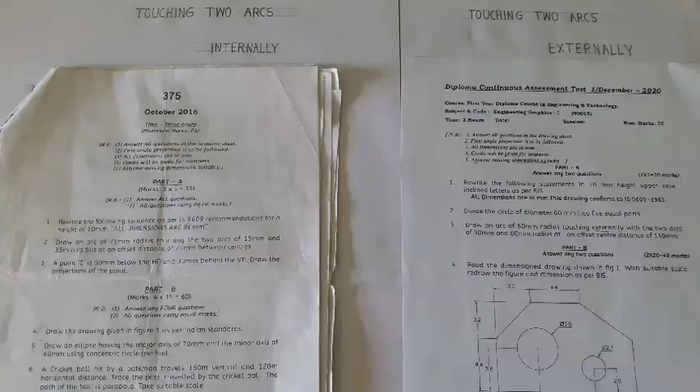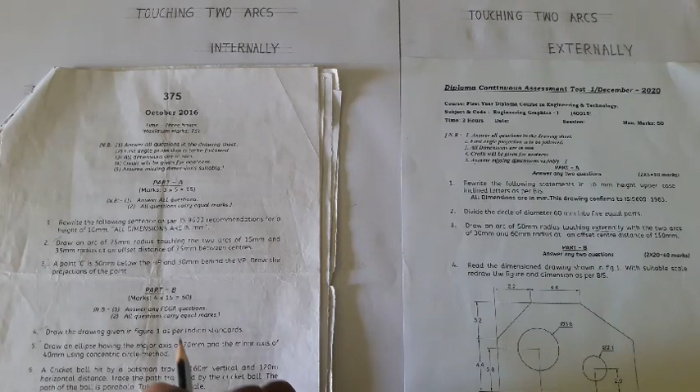Okay, how to read the questions? First of all, we read the touching two arcs internally question. We read: draw an arc of 75 mm radius, touching the two arcs of 15 mm and 35 mm.

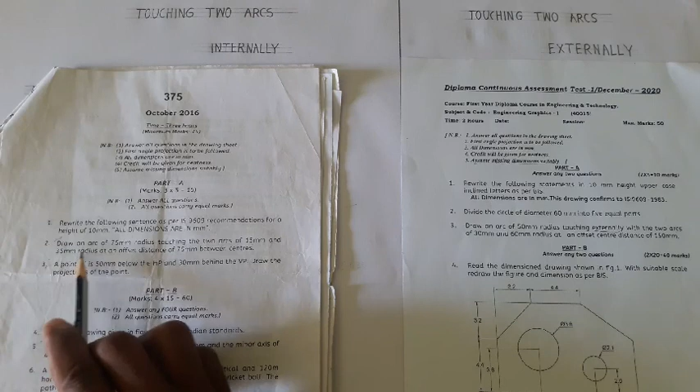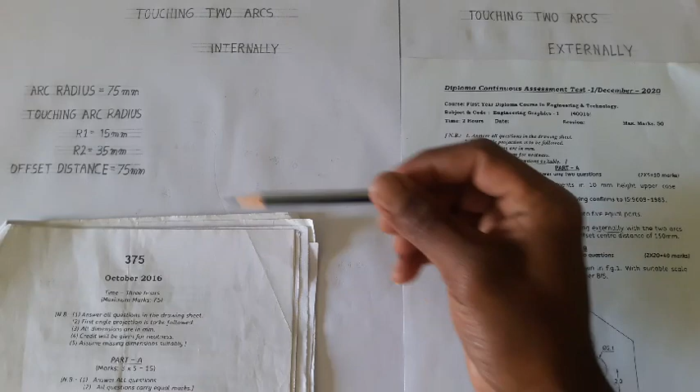Between the centers. Okay, this is the question for touching two arcs internally. We write the following data: arc radius 75 mm, touching arc radius 1 15 mm, radius 2 35 mm, and offset distance is 75 mm.

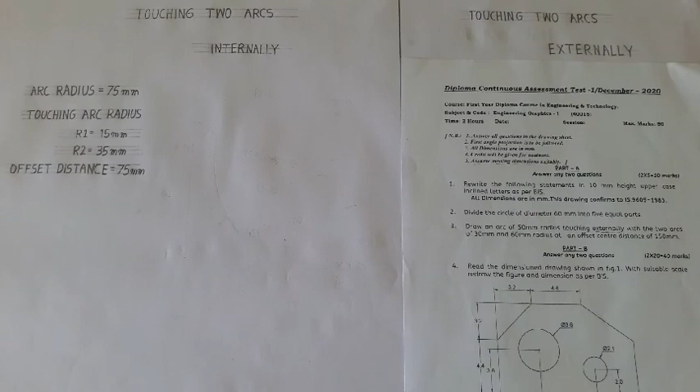Next we read the touching two arcs externally. This is the question for touching two arcs externally. Draw an arc of 50 mm radius touching externally with the two arcs of radius 1 30 mm, radius 2 60 mm, at an offset center distance of 150 mm.

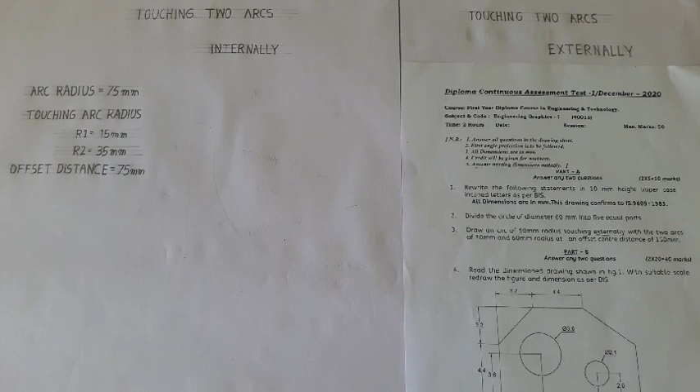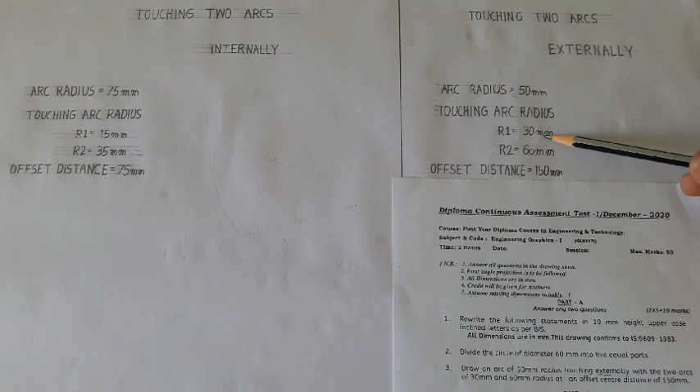We write the following data: 50 mm arc radius, radius 1 30 mm, radius 2 60 mm, offset center distance is 150 mm. We write down the following data carefully.

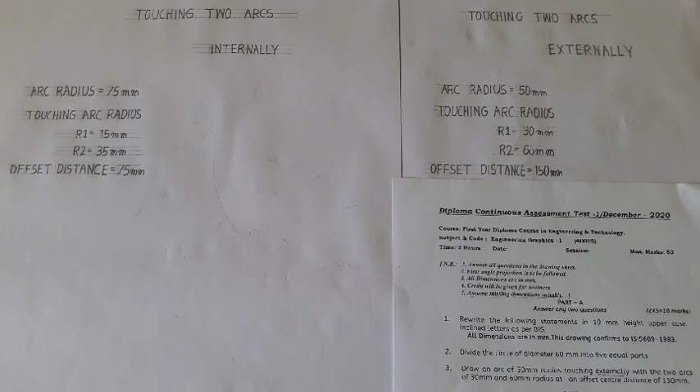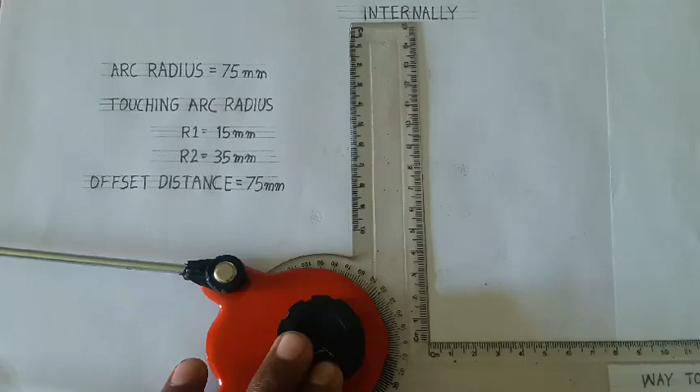First of all we draw the touching two arcs internally. Given data, first we take the offset distance as 75 mm. Draw a vertical line of 75 mm at any point. Take this point as A. Radius 1 equal to 15 mm; we take 15 mm.

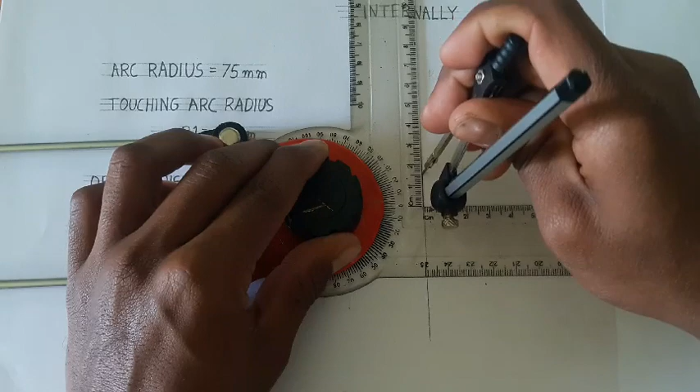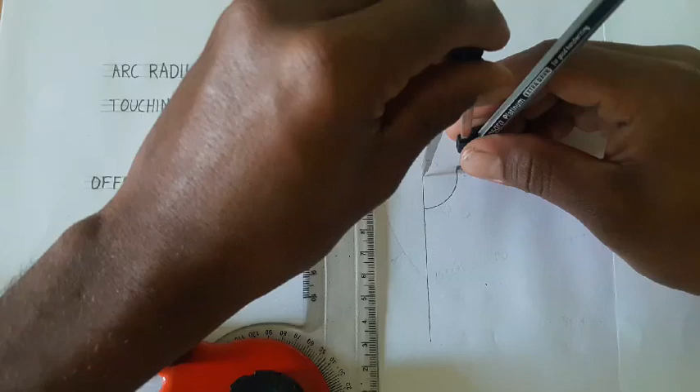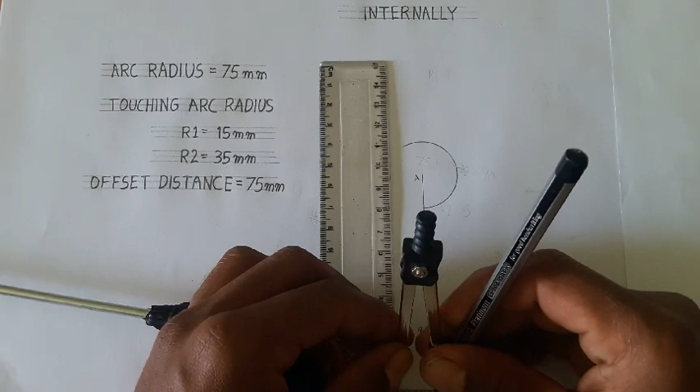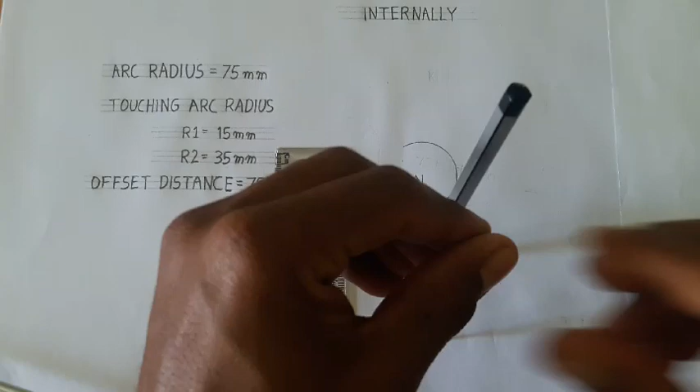We draw the arc for radius 1, 15 mm. At the same time, put this point as B. Take the radius as 35 mm. We mark the 35 mm, take the center as point B, and draw an arc of radius 2, 35 mm.

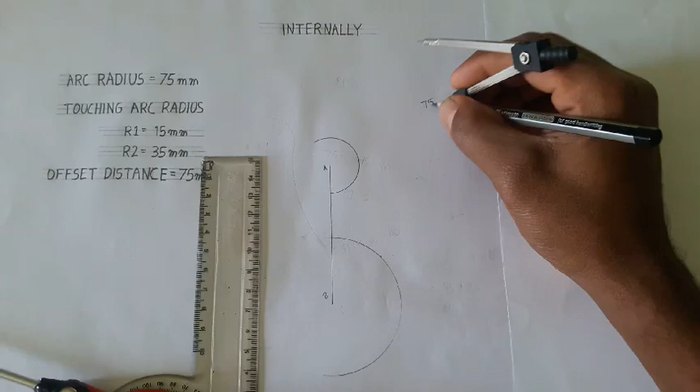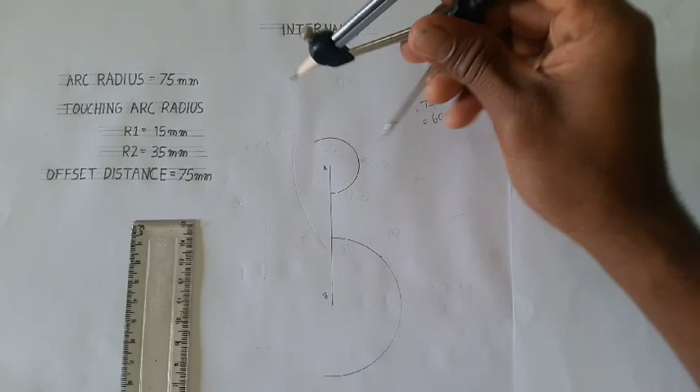Now we subtract: arc radius 75 mm minus radius 1 15 mm gives 60 mm. Take 60 mm in your compass, take the center as point A, and draw the arc on this side.

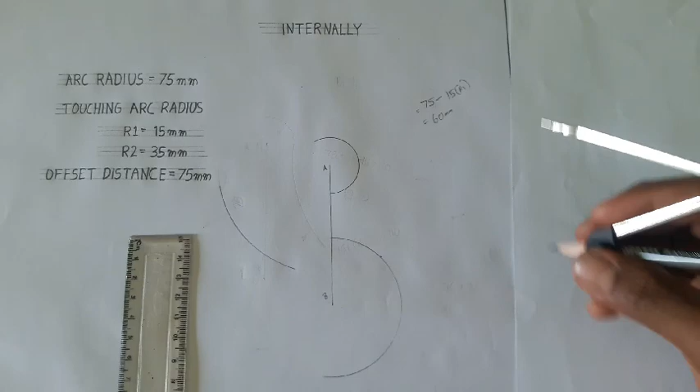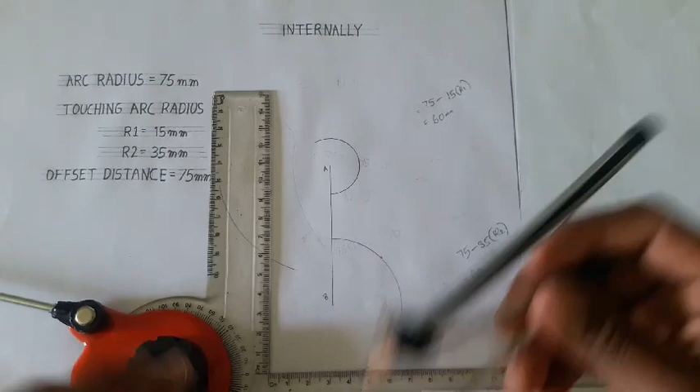Next we take radius 2 from the arc radius. We subtract: 75 mm arc radius minus radius 2 35 mm gives 40 mm. We take 40 mm in your compass, take the center as point B, and intersect this arc. Now we get the point here, this point as O.

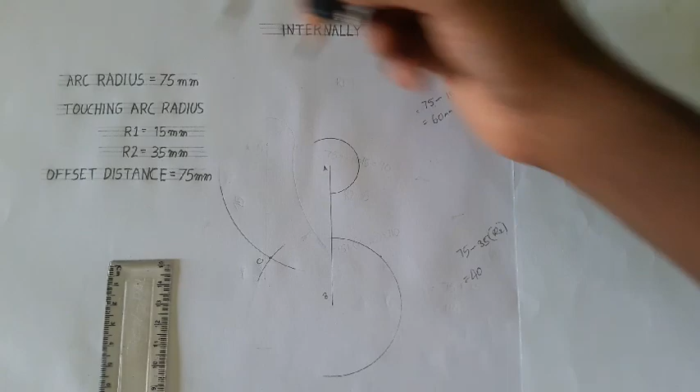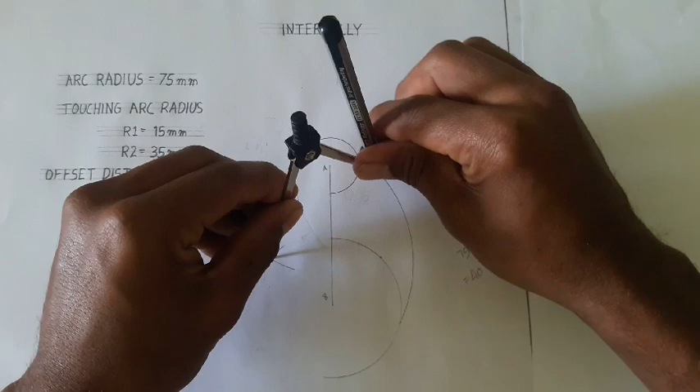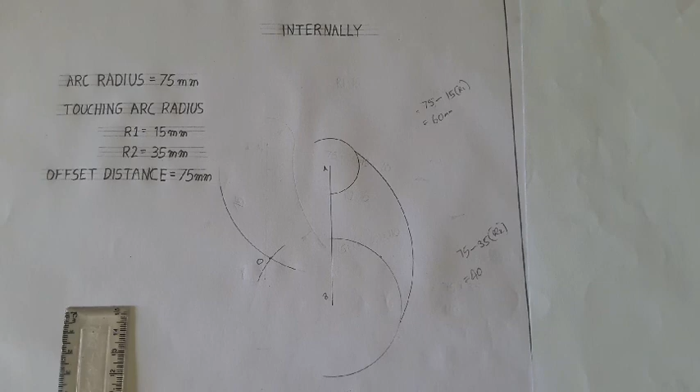Now we take the arc radius 75 mm in our compass. Take the center as point O, from this point to this point. This is the touching two arcs internally. Put the points and mark the dimensions.

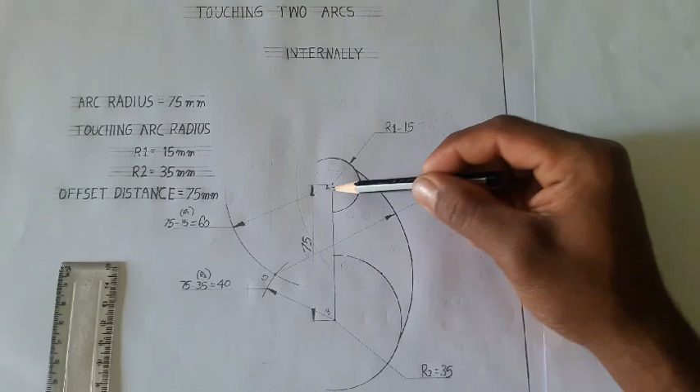Just I revise one more time. Here to here, offset distance 75 mm. Put this point as A and this point as B. Take radius 1, 15 mm, from point A. Using the compass we draw an arc of radius 1 equal to 15 mm.

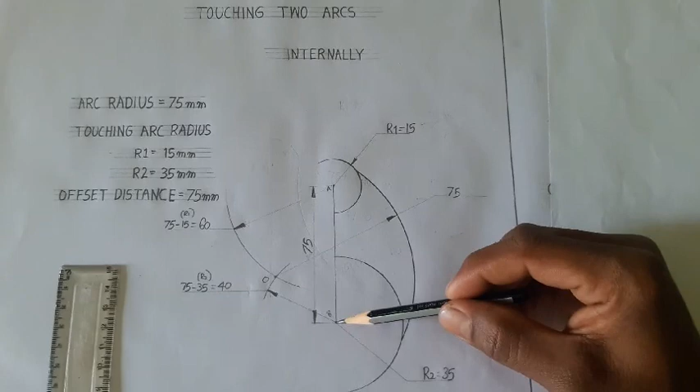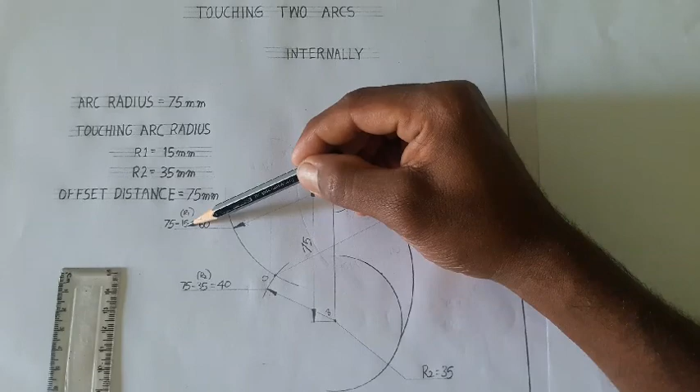At the same time, radius 2 35 mm, we take the compass at point B and draw an arc of radius 2, 35 mm. Next we take the arc radius 75 mm, subtract the radius 1 value 15 mm, and we get 60 mm.

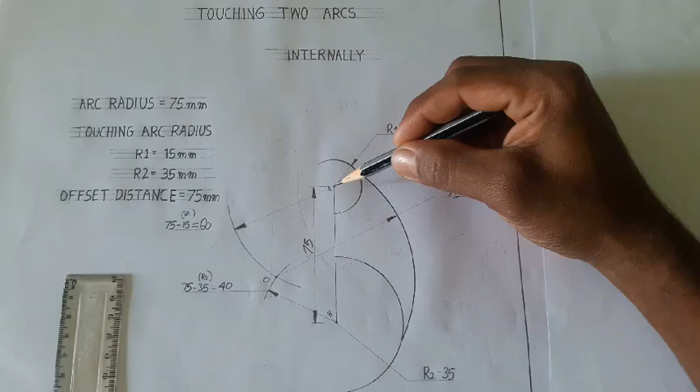Locate the point as same as A point. Why we take the point A as radius 1: we take the point as 75 minus 15 equal to 60 mm, in A point, same manner. From this point we draw an arc of radius 60 mm: 75 minus radius 1, 15, means 60 mm, we draw an arc.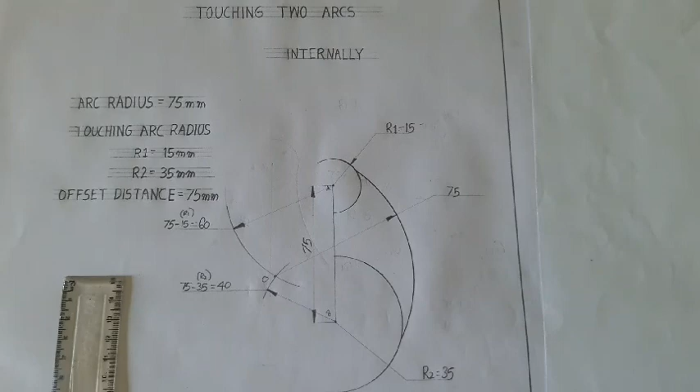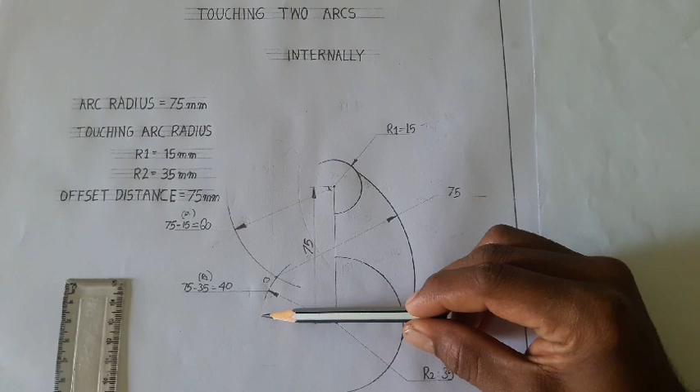Next we locate the center as B. On your compass, mark the dimension as arc radius 75 mm minus radius 2, 35 mm, we get 40 mm. With center B, draw an arc of radius 40 mm. Now the 40 mm and 60 mm arcs intersect here; we put the point as O. Now we take the compass marked as arc radius 75, here to here, and we draw an arc.

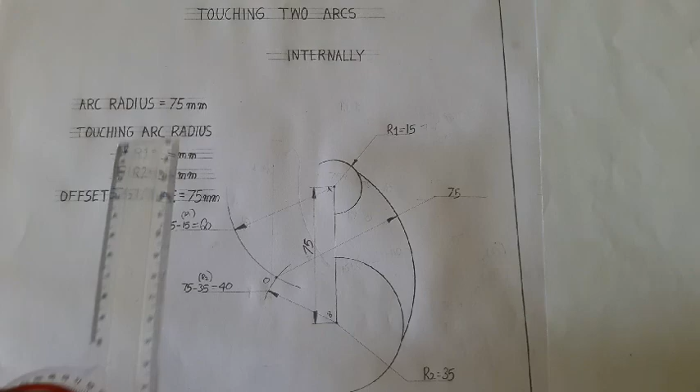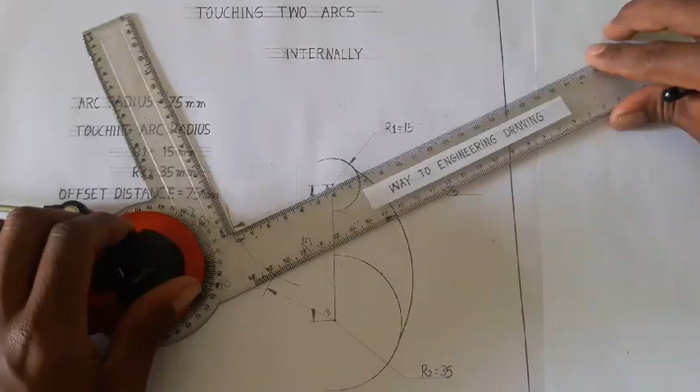Now we check all the radii. Radius 1 equal to 15 mm. Next, radius 2 equal to 35 mm. Here to here means 40 mm, here to here means 60 mm, and we got the center point as O, and we draw an arc of 75 mm. This is the procedure for touching two arcs internally.

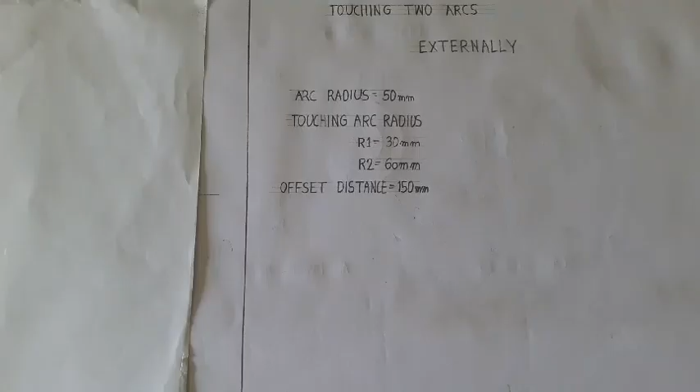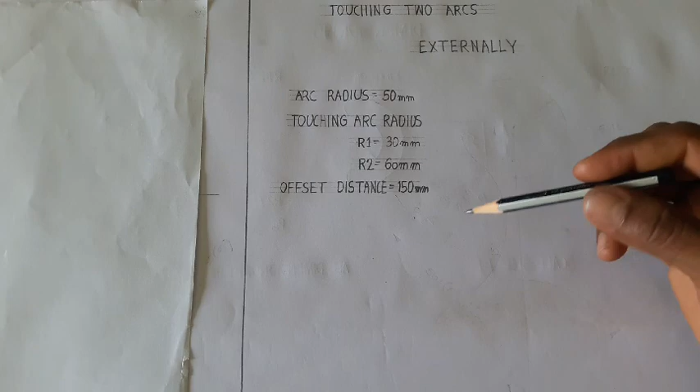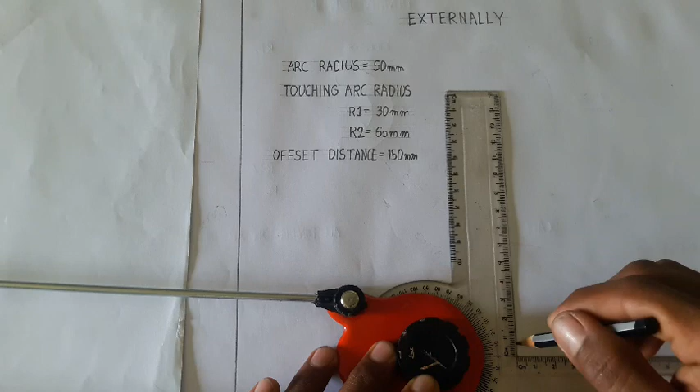Next we draw the touching two arcs externally. We already have the given data from our question. How to draw: first we take the offset distance as 150 mm. Draw a line 150 mm vertically. This is called point A, this is called point B.

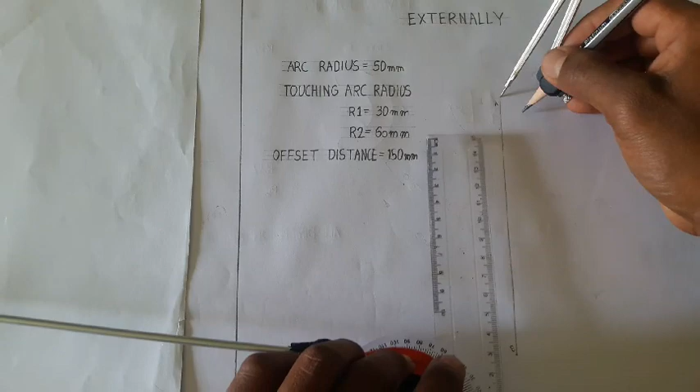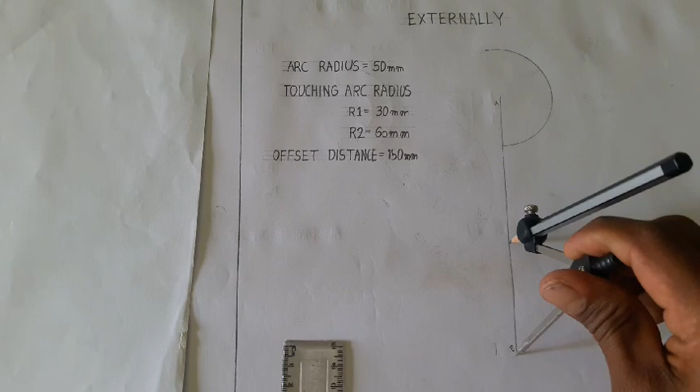Now take radius 1 with center as point A; radius 1 is 30 mm. We mark 30 mm radius and draw an arc of 30 mm radius. Next we take radius 2 as 60 mm. We mark 60 mm first and locate the center as point B. Draw an arc of radius 2. Radius 2 is 60 mm.

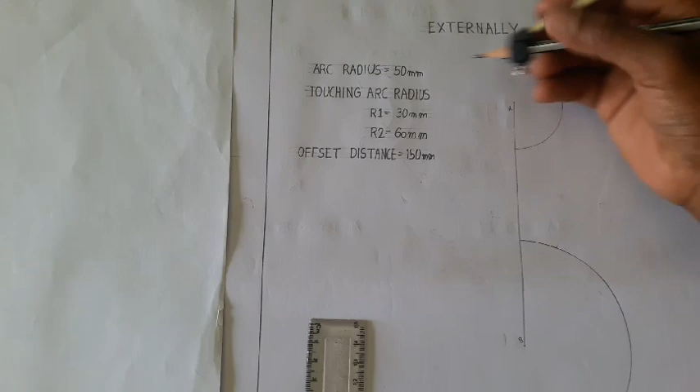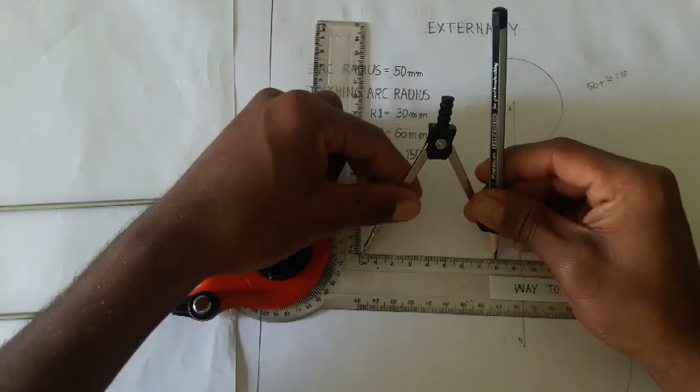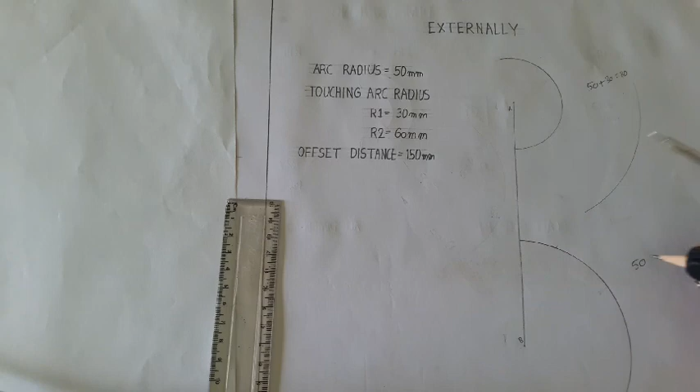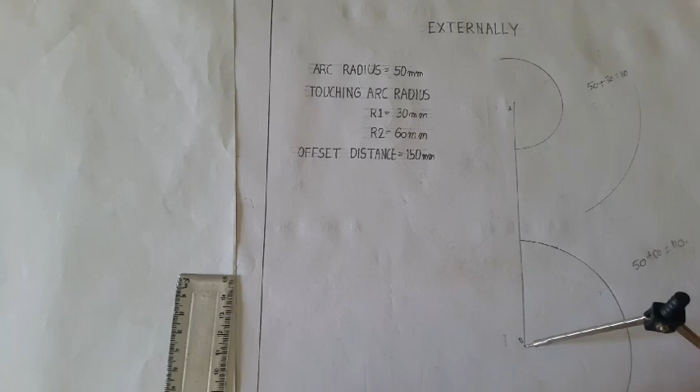Next, the arc radius is 50 mm, and adding the radius 1 value 30 mm equals 80 mm. Now mark 80 mm on your compass. Take the center as point A, draw an arc of radius 80 mm. At the same time, arc radius 50 mm plus radius 2, 60 mm, equals 110 mm. Take 110 mm with your compass. Take the center as point B and intersect the 80 mm arc.

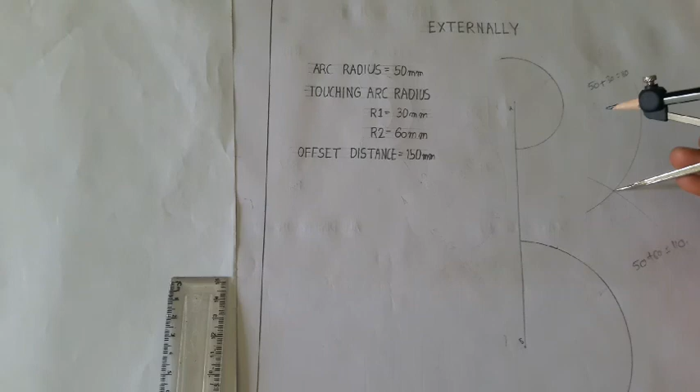Next we take the arc radius 50 mm in your compass. Take this point O as the center and draw an arc of 50 mm. That's all.

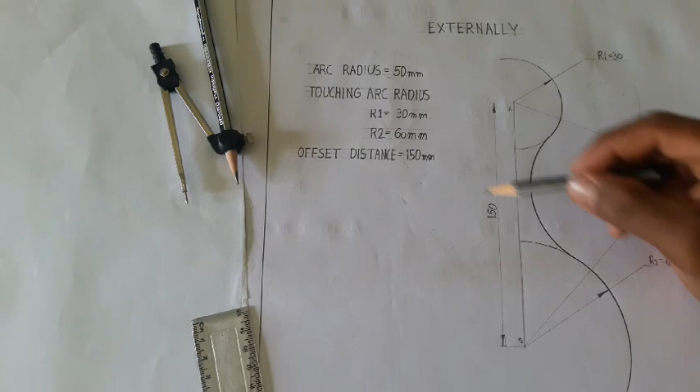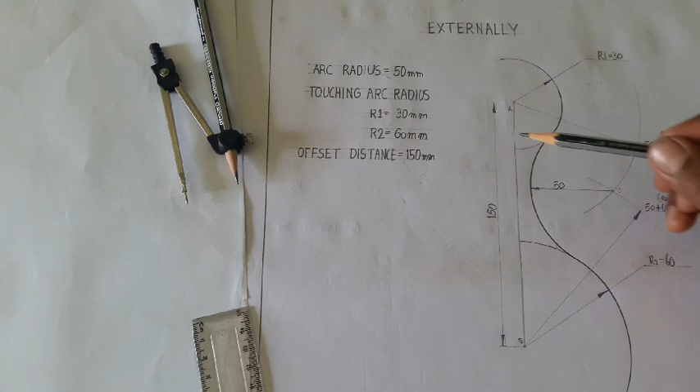Once again, listen. From this point to this point, we draw the offset distance of 150 mm. Next put the points A and B. With point A as the center, take the radius as 30 mm and draw an arc of 30 mm. Next, radius 2 is 60 mm; we take the measurement with the compass. Take the center as point B and draw an arc of radius 2, 60 mm. So we have 30 mm and 60 mm.

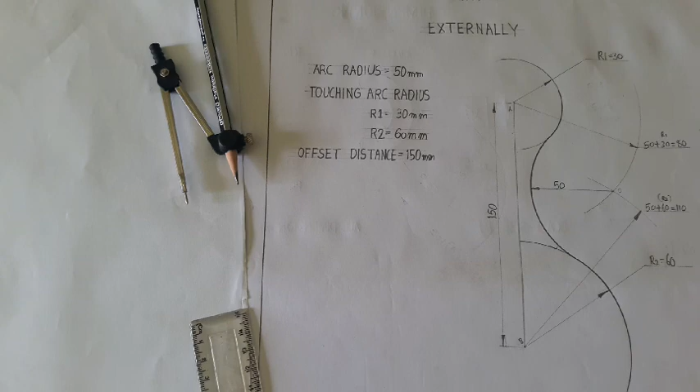Next we add the arc radius 50 plus 30 equal to 80 mm, taking the center as A. We draw an arc of 80 mm with the center here. Next we add the arc radius 50 mm and radius 2, 60 mm: 50 plus 60, 110 mm. Take the center as point B and draw an arc of 110 mm. The 110 and 80 mm arcs intersect at point O.

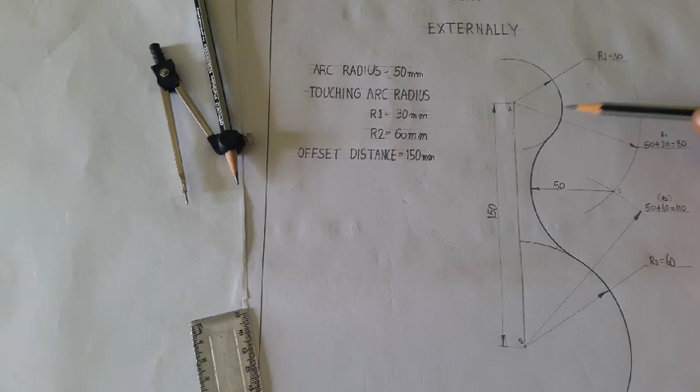Take point O as the center. We take the measurement as 50 mm, here to here 50 mm, joining the touching arcs. Now we have completed touching two arcs internally and externally. This is the difference between internally touching two arcs and externally touching two arcs.